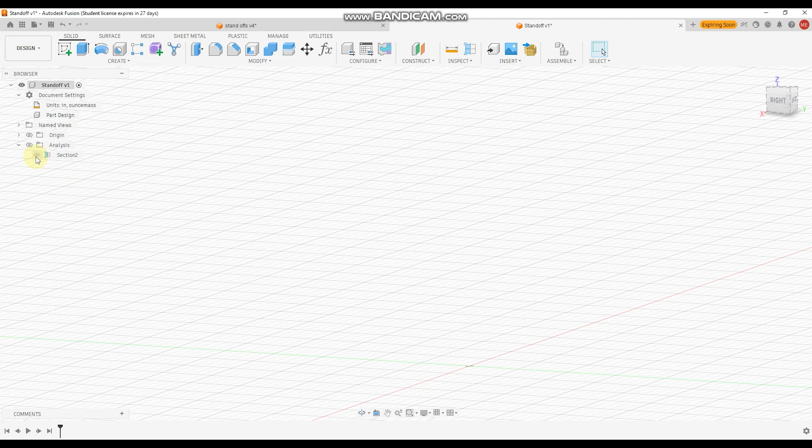What's up, everybody? In this video we're going to go through how to design a threaded bolt and nut, or in my design it's going to be a standoff that I'll be using to mount an acrylic sign into the wall. So I'm going to start with creating 3 circles: one for the outer diameter, one inner, and one for the hole, the mounting hole.

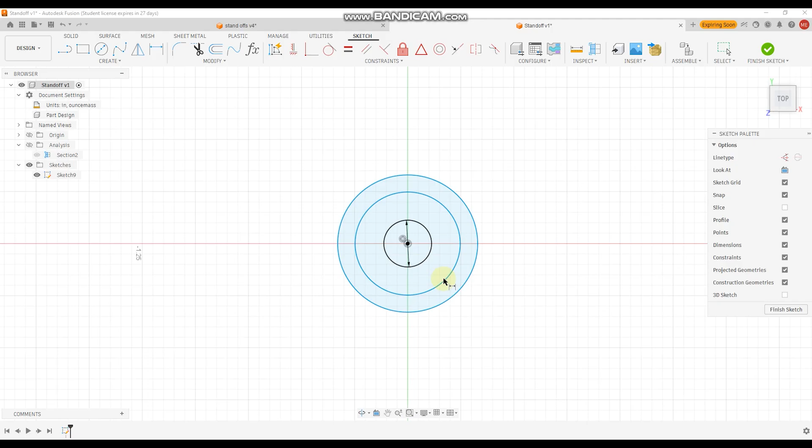I already have a parametric table inserted here, so in the future whenever you want to update your design, you don't have to go through the design completely. You just go to the table and modify the values from there. It'll be more feasible and easier to do.

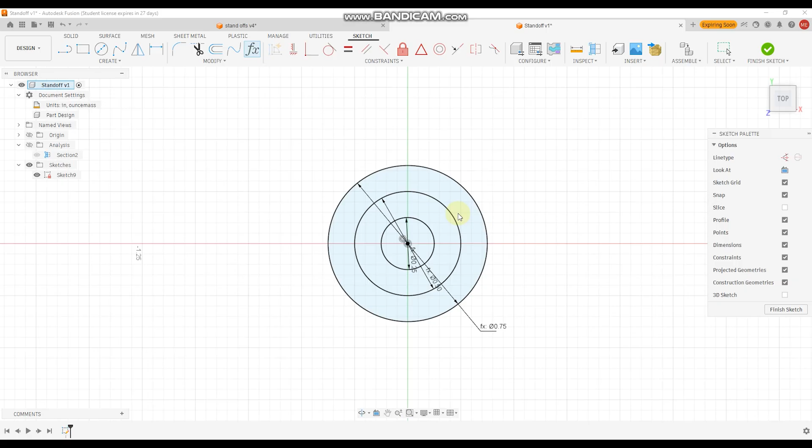It's a really good practice to start using parameters like that. Saves you tons of time, especially when you're working on a very complicated design. This one is very simple, so you don't need to do it, but I like it because, as you'll see, I made the thread 3/4 of an inch.

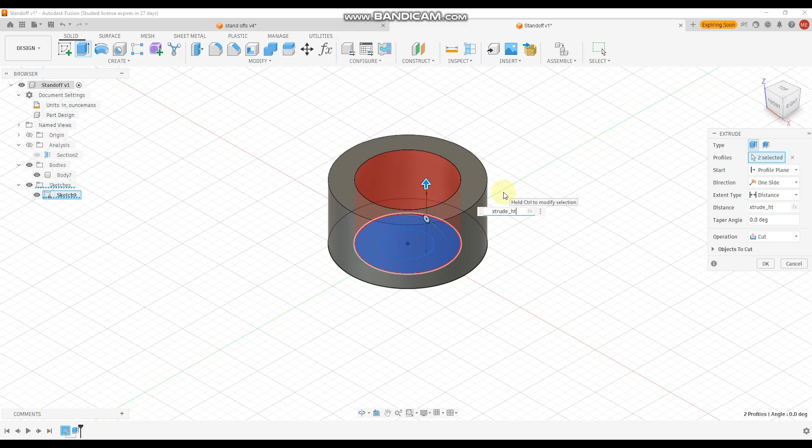If I want to make it longer, I just go there and change the value and update. Okay, here I'm doing the base, so this is the extrude. I made it 3/8, and now the thread, the arm, that should be 3/8 times 2, and I make sure it's set to join.

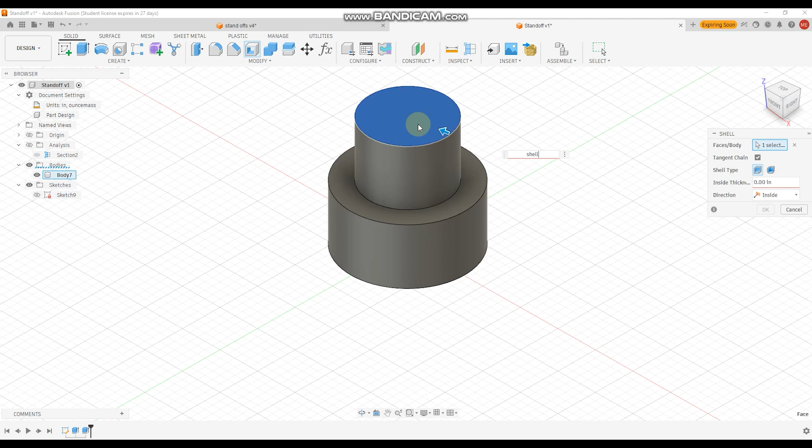Next we've got to create a shell. My wall thickness, I decided to do 0.1, which is a pretty decent size for the threads, not too thick or too thin.

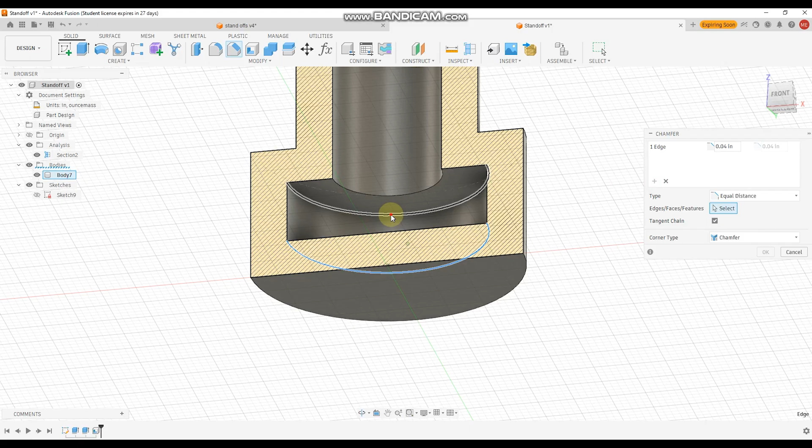Next we've got to enable this section analysis to see the inside of the bolt, because when you create the 2 circles on top of each other, they create sharp edges. Whenever you 3D print, it'll be so hard to print those without support, so adding 2 chamfers will do the trick.

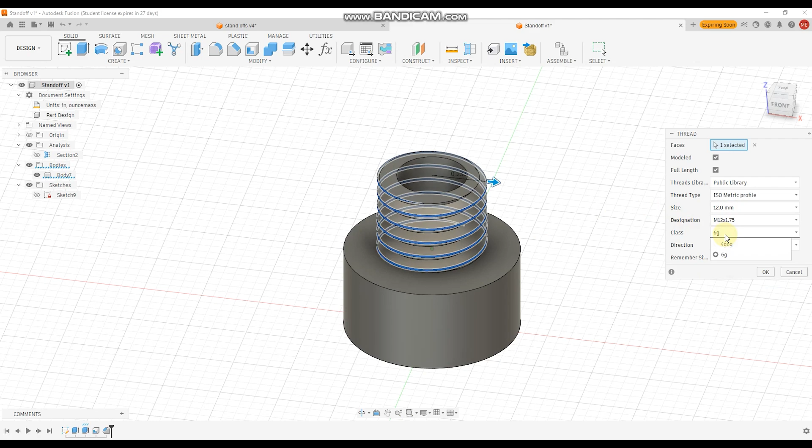Next we've got to apply the thread using the thread option, and make sure modeled is checked. As far as the type, I like the ISO metric profile because it works pretty good for this size. Then Fusion decides what size is best, so if you're not limited or don't have to follow certain numbers, let Fusion decide for you. So here's a small trick.

The top of the thread is super sharp, so we can't chamfer that. To do so, you go back one step in the timeline to the original, chamfer it there, then move the timeline forward, and that will do the trick—moving the chamfer to the front and then the timeline to the front.

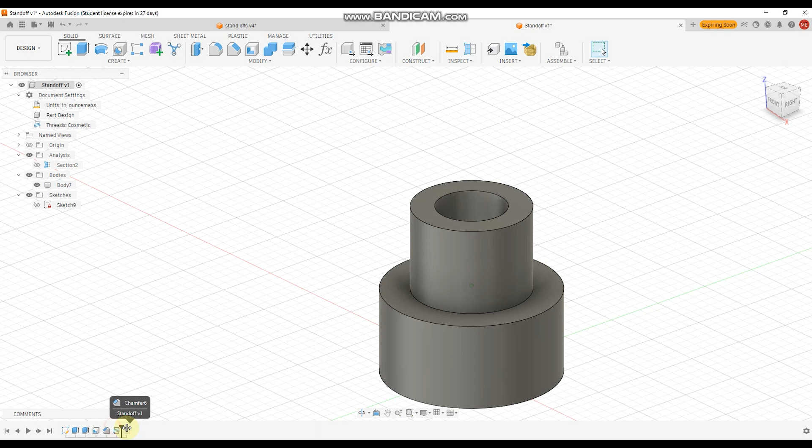Next we've got to name the bodies. Naming is very important, especially when you're working on a complicated design, so this way you can get to it super easily.

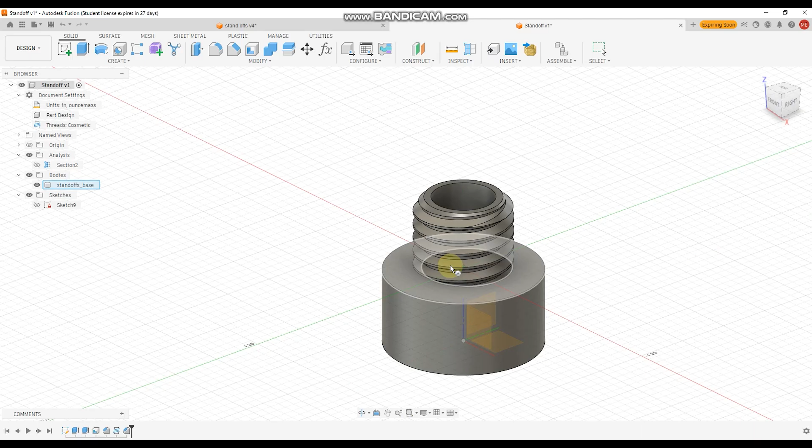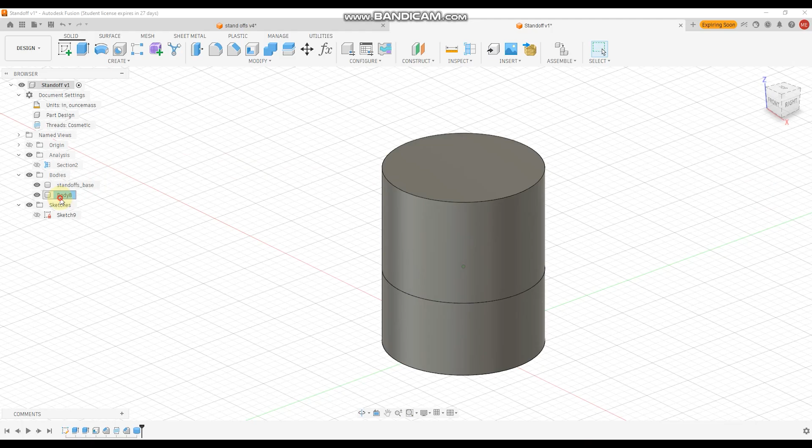Next we've got to create the nut, or the top, the lid. I'm drawing a circle from the center to the edge of the bottom thread, and I'm going to extrude it to whatever the extrude height is, plus a little bit extra for the thickness of the cap. So 0.15, which is around 4 mil, is pretty solid, 4 or 5 mil.

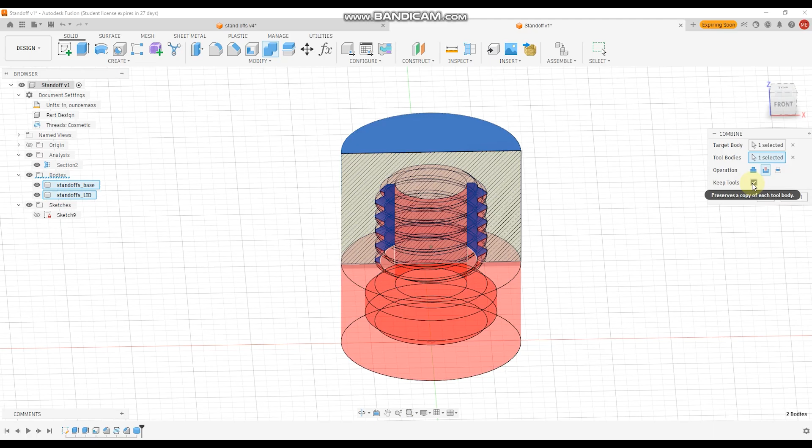Now naming the body one more time. Next we've got to separate them from each other, the threads. To make a copy, you go to the combine command, then intersect, select the lid first, then for the body select the body down, make sure it's set to cut, and keep those. So now you have two parts.

Now next you've got to get rid of this little piece—press pull, drag up until it snaps, and hit OK. After that, the thread will be 100% perfect match.

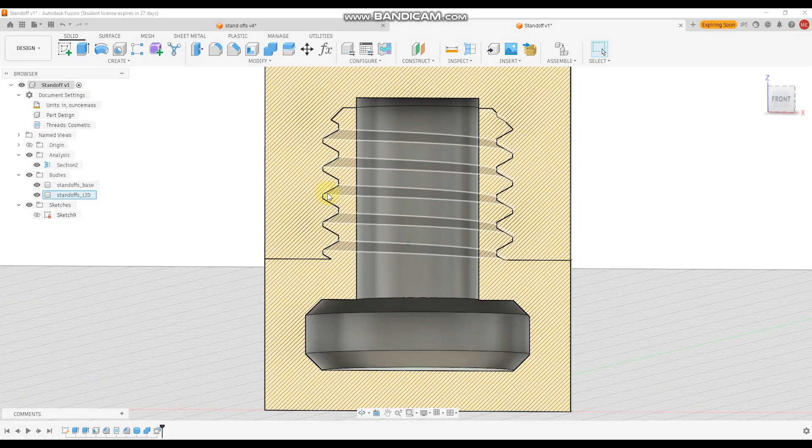We don't like that—we have to add some area clearance so that when you thread them together, it'll be super easy. In order to add clearance, you have to use press pull and add a little bit of tolerance there. It's kind of plug and play, trial and error.

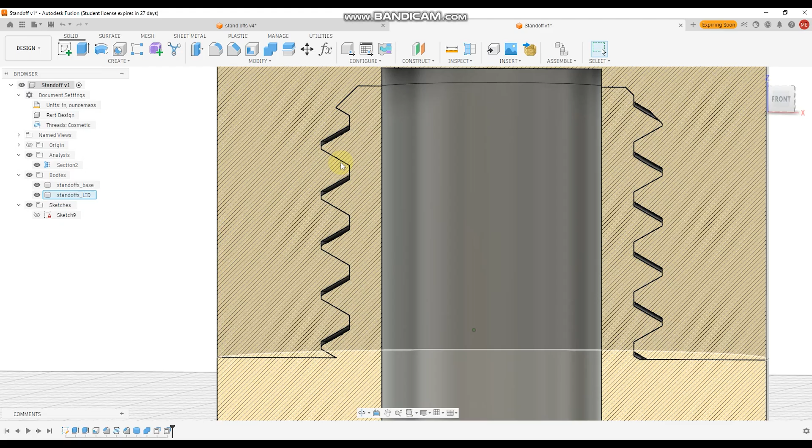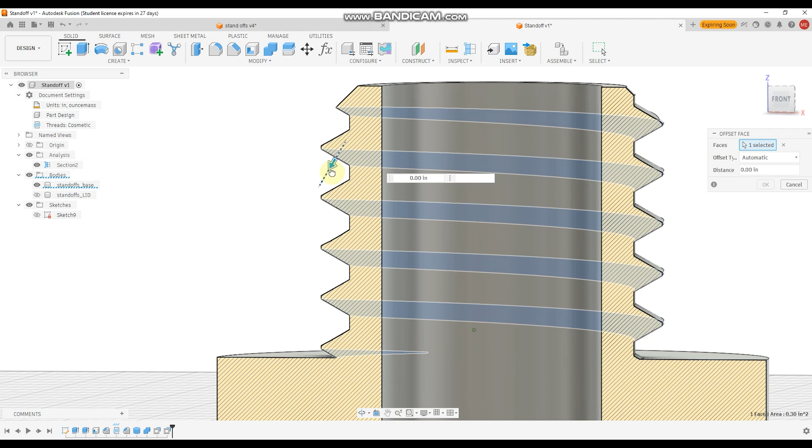Yeah, start with the 0. Again, take your time, make sure to have tolerance or clearance around the whole thread. We're almost there.

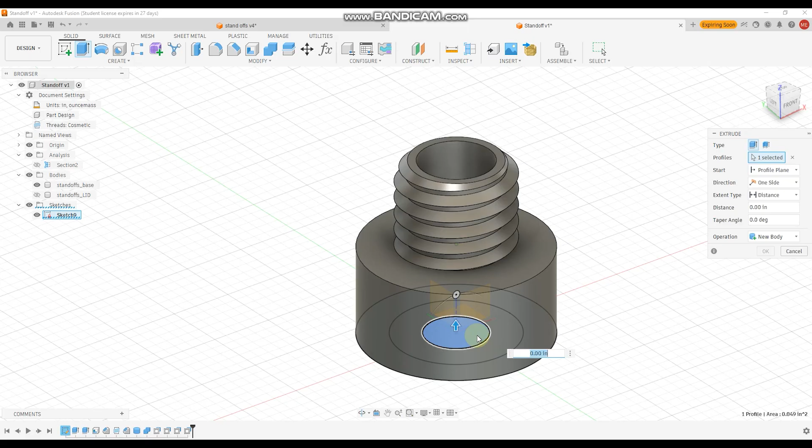Next I've got to make the drill hole. We already drew it in the first sketch. Extrude, cut, and then move up.

You can do this because the thickness is 3/8 and it's already hollow, but it's better to do it relative to the object. This way, if you ever change it, you'll never get it wrong—you don't have to worry about it. It's a really good practice to do it that way.

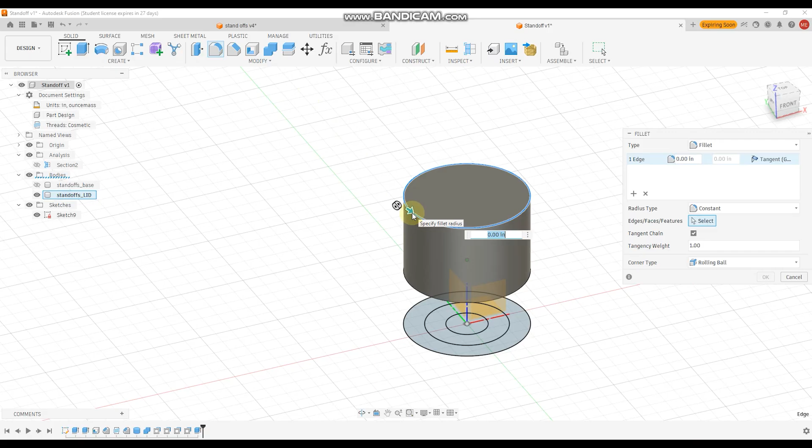Next, I'm going to round the top, adding a fillet of 0.2, and that's it.

Okay, so this is what we designed together. That's it—nice and easy.

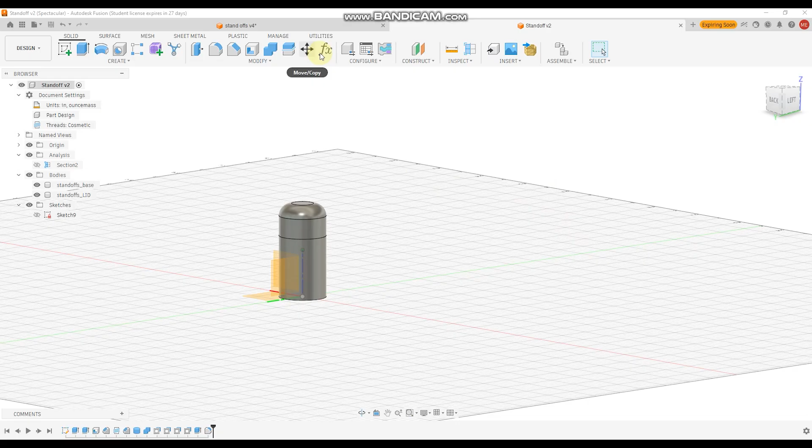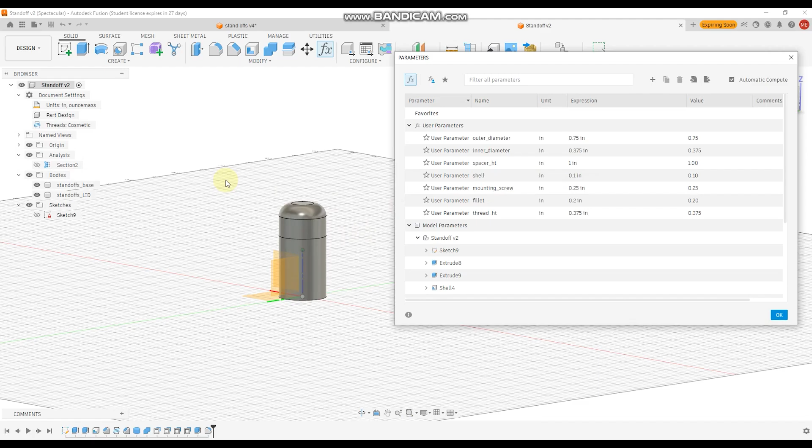One change I did to the design with the parametric table: I made a special dedicated parameter, one for the thread and one for the spacer. I changed the extrude height into spacer because it's much easier to change the spacer here, and each one is customer specific. I made the spacer 1 inch in this example, and the thread is 3/8.

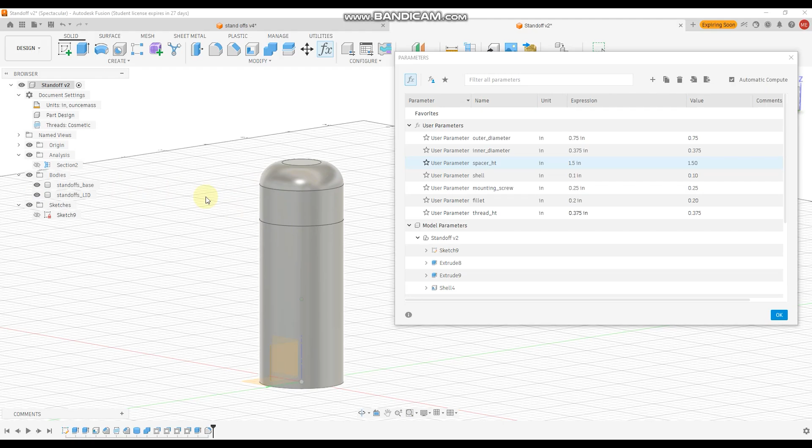If you want to change the thread into a bigger or longer one, let's say half an inch, you just type in half an inch and it updates automatically. Let's put it back to 3/8. Same thing for the spacer—if you do 1.5 or 1.25, whatever value you want, you just punch it in and that'll do it. Did you notice how the lid automatically adapts to these sizes here?